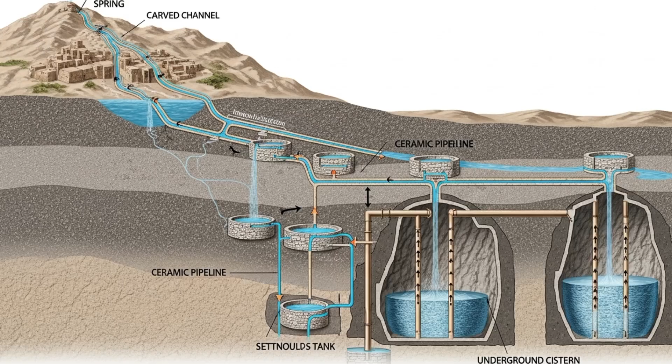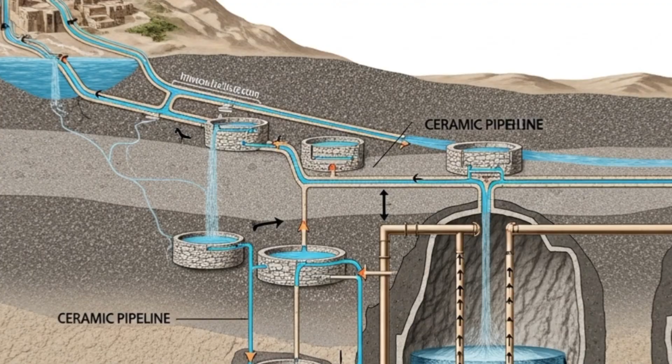Walk through the Siq, that narrow mile-long canyon carved through red sandstone that serves as the entrance to Petra, and you're walking alongside an ancient water channel carved into the cliff face. This channel brought water from springs in the mountains miles away, following the natural contours of the landscape with such precision that water flowed by gravity alone. No pumps, no motors, just careful calculation of slope and elevation, ensuring water reached the city.

But that's just the beginning. The Nabataeans built a comprehensive water management system that included dams to capture seasonal flash floods, ceramic pipelines to transport and distribute water under controlled pressure, settling tanks to filter sediment, and hundreds of cisterns carved into the living rock to store water during dry periods. These cisterns alone could hold millions of gallons, enough to supply the city for months when no rain fell.

The genius is in the details. The Nabataeans understood that water flow could be controlled by pipe diameter and elevation change. They created pressure-reducing basins where rapidly flowing water would slow and settle, preventing pipes from bursting. They used ceramic pipes rather than lead, which the Romans favored, avoiding the health problems associated with lead contamination.

The joints between pipe sections were sealed with a hydraulic mortar that hardened underwater, creating watertight connections that survived 2,000 years. The water channels carved into cliff faces demonstrate remarkable surveying capability. To make water flow consistently over miles, you need a continuous downward slope. Too steep and water flows too fast, causing erosion and wasting pressure. Too shallow and water stagnates, allowing sediment to accumulate and block flow.

The Nabataeans achieved a gradient of about 3 degrees, optimal for sustained flow, maintaining this precise angle over distances of several miles through winding canyons and irregular terrain. They also built channels on both sides of the Siq, a redundancy that protected against blockages and provided backup during maintenance. This shows sophisticated systems thinking, not just building infrastructure, but planning for its long-term operation and the inevitable challenges of maintenance in a harsh environment.

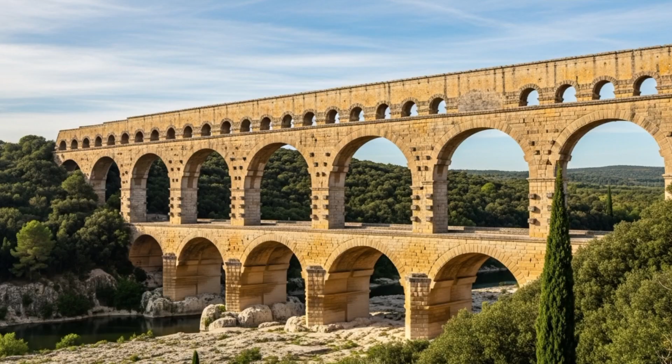The result was a desert city with water infrastructure rivaling modern standards. Wealthy homes had running water piped directly into courtyards and private baths. Public fountains called nymphaea provided social gathering spaces and demonstrated the city's prosperity. Gardens and agricultural terraces surrounding the city grew crops impossible in a natural desert environment. Petra wasn't just surviving in the desert. It was thriving because the Nabataeans had essentially conquered water.

Now shift to the Romans, who took hydraulic engineering to an empire-wide scale. Roman aqueducts are famous, but their sophistication is often underestimated. The city of Rome at its peak was supplied by 11 major aqueducts, bringing over 300 million gallons of water daily from sources up to 57 miles away. This is comparable to water consumption in modern cities of similar size.

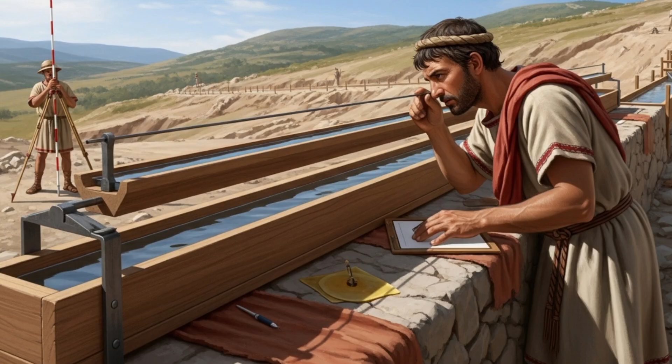The Romans used instruments like the chorobates, a leveling device using water to establish horizontal reference, and the groma for establishing perpendicular lines. With these simple tools and careful observation, they achieved precision that would shame many modern construction projects.

The Pont du Gard in southern France exemplifies Roman engineering mastery. This 3-tiered aqueduct bridge stands 160 feet tall, spans 900 feet across the Gardon River, and was built using fitted stone blocks without mortar. The water channel at the top maintained its precise gradient while spanning this enormous distance, delivering water to the city of Nîmes from a source 30 miles away. The structure has stood for 2,000 years, surviving floods that destroyed modern bridges built alongside it.

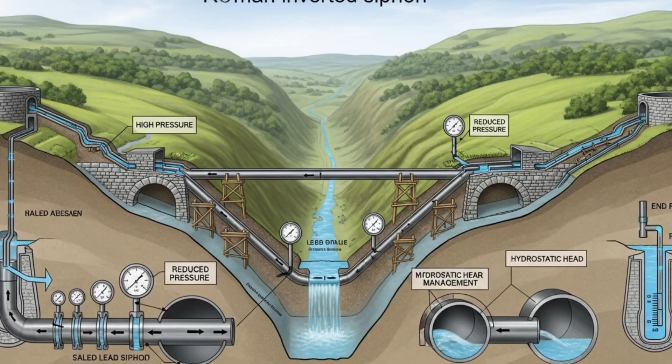Roman aqueducts weren't just stone channels. The system included settling tanks where sediment could fall out of suspension, distribution castellum, where water was divided among different parts of the city, fountains providing public access, and sophisticated underground sewers removing wastewater. The Cloaca Maxima, Rome's main sewer, was built in the 6th century BC and is still functioning today, 26 centuries later. The Romans understood water pressure and used it strategically.

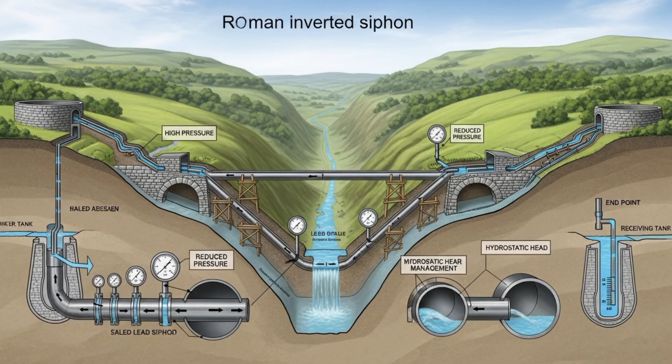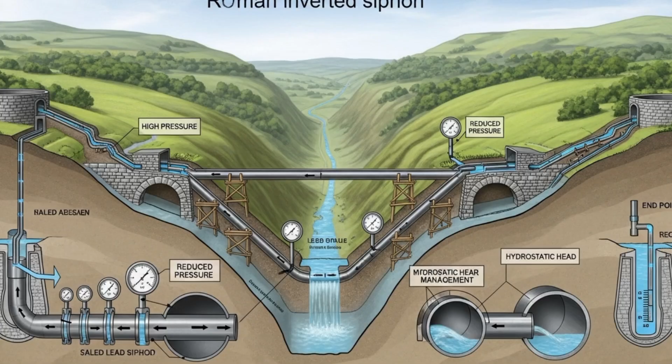The inverted siphon was a Roman innovation, allowing aqueducts to cross valleys without building enormous bridges. Water would descend one side of the valley in a sealed lead or ceramic pipe, cross the valley floor under pressure, then rise up the other side to continue flowing. This required careful calculation of pressure forces and pipe strength, and the Romans made it work reliably across their empire.

Go further back to the Minoans on Crete around 1600 BCE, and you find even more surprising sophistication. The palace at Knossos had running water, indoor toilets with wooden seats and flushing mechanisms, bathtubs with both hot and cold water supplies, and underground sewage systems removing waste from the building. This is 3,600 years ago, over a millennium before Rome was founded, 2,000 years before most European cities had such amenities.

The Minoans built terracotta pipes with tapered joints that fit together, allowing flow in one direction while preventing backflow. They created settling basins and filters to clean water before it entered the palace. They had separate systems for fresh water supply and wastewater removal, understanding that mixing the two caused disease. Archaeological evidence shows they even understood the principle of separating gray water from washing and black water from toilets, treating each differently.

The palace water system included fountains for aesthetic purposes and temperature regulation. In the hot Mediterranean climate, evaporating water cooled surrounding air, an early form of air conditioning. Light wells brought sunlight and air into interior rooms, creating ventilation that helped manage humidity and air quality. The integration of water management with architectural design shows holistic thinking about building as a total environment.

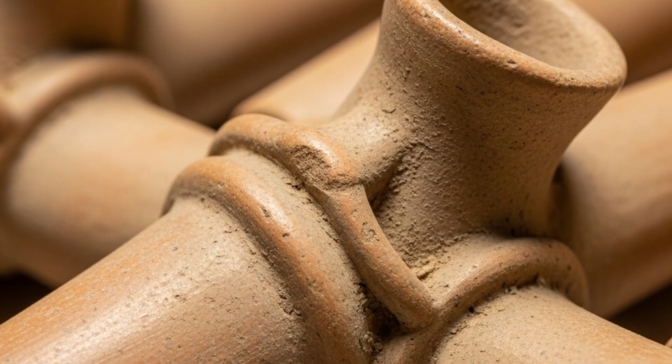Ancient hydraulic engineering wasn't limited to Mediterranean civilizations. The Indus Valley civilization around 2500 BC built cities like Mohenjo-Daro with standardized fired brick sewers running beneath every street. Houses had private bathrooms with drainage systems connecting to the municipal sewers. The streets themselves sloped subtly toward drains, channeling rainwater away from buildings. This represents urban planning at a scale and sophistication that wouldn't be seen again for thousands of years.

In Sri Lanka, ancient Sinhalese engineers built massive irrigation reservoirs called tanks, some covering thousands of acres and holding billions of gallons. These tanks were connected by canals forming integrated irrigation networks, supplying water to rice paddies across entire regions. The Kalawewa Reservoir, built in the 5th century CE, used a dam over 3 miles long and 40 feet high to create a reservoir that still functions today, 1,500 years later.

The Chinese developed extensive canal systems for irrigation, transportation, and water management. The Dujiangyan irrigation system, built around 250 BCE, still irrigates over 2 million acres in Sichuan province.

The system uses no dams, but instead divides the Min River using carefully shaped levees and channels that automatically regulate water flow, directing more water to irrigation during dry seasons and more to the main river during floods. This self-regulating system has operated for over 2,000 years with minimal maintenance.

Qanat systems in ancient Persia represent another hydraulic marvel. These are underground channels, sometimes dozens of miles long, that tap into groundwater in mountain foothills and bring it to surface settlements by gravity flow. The tunnels are hand-dug, often over 100 feet deep, following precise gradients to maintain water flow. Vertical shafts every few dozen meters provide access for construction and maintenance. Some qanats built 2,000 years ago still supply water to modern communities.

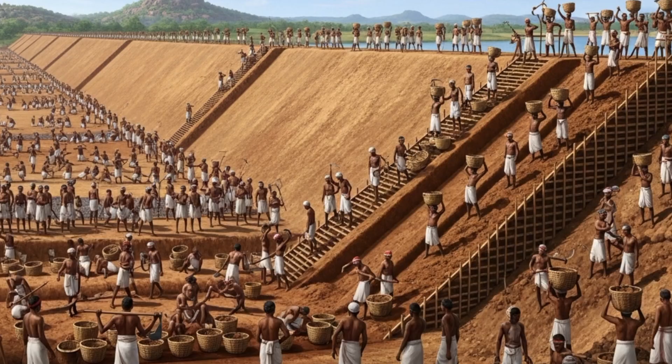What all these systems share is an understanding of fundamental hydraulic principles. Gravity provides a motive force for water flow. Maintaining specific gradients ensures efficient flow without erosion. Separating clean water from waste prevents disease. Storing water in reservoirs buffers against seasonal variation. And redundancy and maintenance access are essential for long-term operation.

Ancient engineers discovered these principles through observation and experimentation. They couldn't calculate pipe friction losses using Darcy-Weisbach equations or model pressure drops with computational fluid dynamics, but they could observe what worked, refine designs through trial and error, and accumulate knowledge across generations. The result was practical engineering that worked reliably for centuries.

The social organization required for these projects was as impressive as the technical achievement. Building aqueducts across tens of miles, carving thousands of meters of tunnel through solid rock, managing coordinated construction across years or decades. These required administrative capabilities, workforce organization, resource management, and long-term planning. Hydraulic infrastructure represented major public investment, and its success depended on maintenance and operation across multiple generations.

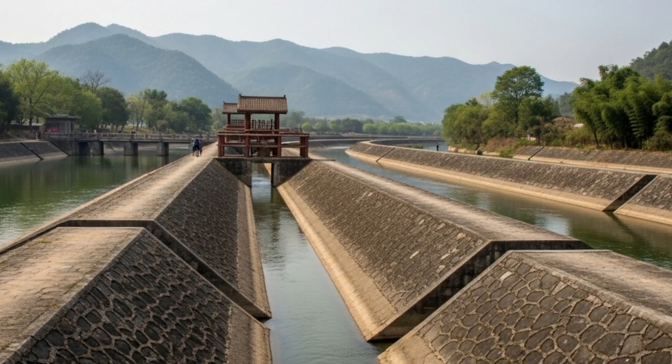Modern analysis using technology the ancients never imagined has revealed more about their capabilities. Laser scanning of Roman aqueducts shows consistency in gradient within millimeters over mile-long sections. Ground-penetrating radar reveals sophisticated Roman construction techniques, including concrete vaulting and lead pipe networks still intact underground. Chemical analysis of deposits inside ancient pipes tells us what flowed through them and how water chemistry affected infrastructure longevity.

We're also discovering that ancient engineers understood more than we credited them with. The Romans knew adding volcanic ash to concrete made it resistant to water damage, something modern engineers rediscovered only recently. The Minoans understood that U-shaped drain traps prevented sewer gases from entering buildings, a principle reinvented in modern plumbing. Ancient engineers had practical knowledge that worked even if they couldn't explain it in modern scientific terms.

There's irony in the fact that many ancient hydraulic systems outlasted their civilizations. Roman aqueducts carried water long after Rome fell. Nabataean cisterns in Petra held water for Byzantine and Islamic occupiers centuries after the Nabataeans disappeared. These systems were built to last, often over-engineered for their immediate needs, creating infrastructure that served multiple subsequent civilizations.

Modern water infrastructure, by contrast, often has planned obsolescence. Pipes are rated for 50-year lifespans. Treatment plants are designed for current populations without much excess capacity. We build for now, not for millennia. Ancient engineers built for permanence, partly because rebuilding was so difficult and partly because infrastructure was seen as legacy, a gift to future generations.

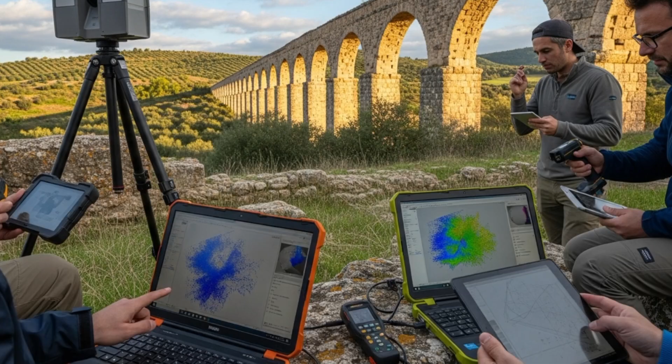This doesn't mean ancient systems were superior in all ways. Modern water treatment removes pathogens ancient systems couldn't. Our pumps can move water uphill and across obstacles ancient engineers couldn't overcome. We can purify contaminated water sources and desalinate seawater. Our capabilities exceed ancient limits in many dimensions. But in longevity, in elegance of gravity-powered solutions, in integration with the natural environment rather than domination of it, ancient hydraulic engineering offers lessons modern infrastructure could benefit from.

The Nabataean approach of capturing and storing intermittent water sources is increasingly relevant as climate change makes rainfall less reliable. Roman emphasis on redundancy and maintenance access addresses problems that plague modern infrastructure. Minoan separation of water systems based on quality and use is a principle modern water management is rediscovering.

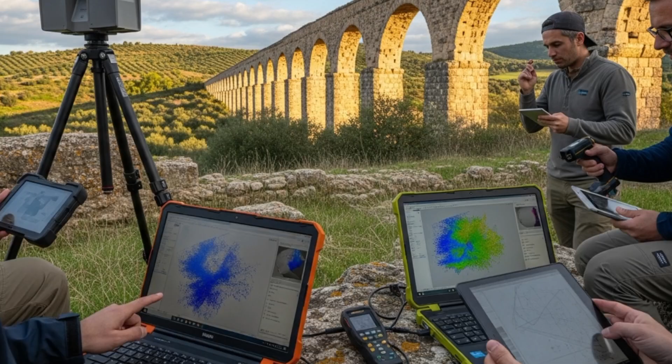Standing beside a Roman aqueduct or exploring the water channels of Petra, you're encountering engineering that has outlasted empires, survived catastrophes, and continued functioning across 2,000 years. That's not ancient primitive technology. That's sophisticated infrastructure designed with deep understanding of hydraulics, materials, and long-term systems operation. The ancient engineers who built these systems were every bit as intelligent as modern engineers, working with different tools but achieving results that command respect and sometimes envy from their modern counterparts.